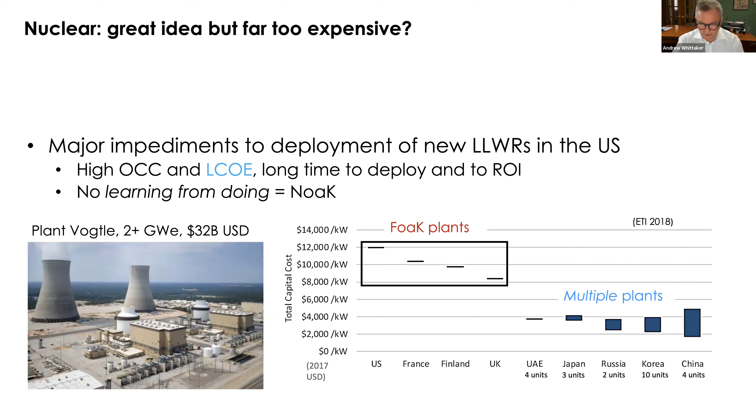So if I step back and I look at the recent experience in the United States, and some of these numbers were assembled in concert with colleagues at Southern Company. If I look back at plant experience, and I try and break the whole process down into pre-construction and construction. The pre-construction activities spanned 8 years. They involved FEED studies that are listed here, ranging from geotechnical studies, probabilistic seismic hazard calculations, SSI analysis, scheme level design, design development, and then production of construction documents, internal and external events, PRA, and licensing. And this took more than 8 years.

And then we move on to construction, which overlapped with some of the pre-construction activities, and there's a further 12 years. So more than 20 years to achieve a return on investment. And in discussions I've had with folks interested in nuclear, but not nuclear engineers, this seems to be a recipe for no commercial customers. One of the challenges that I'll talk about today is the seismic load case, which by and large makes every build nearly a first of a kind.

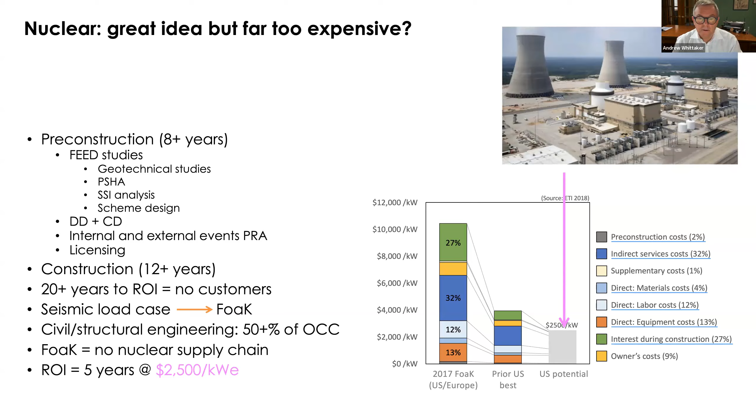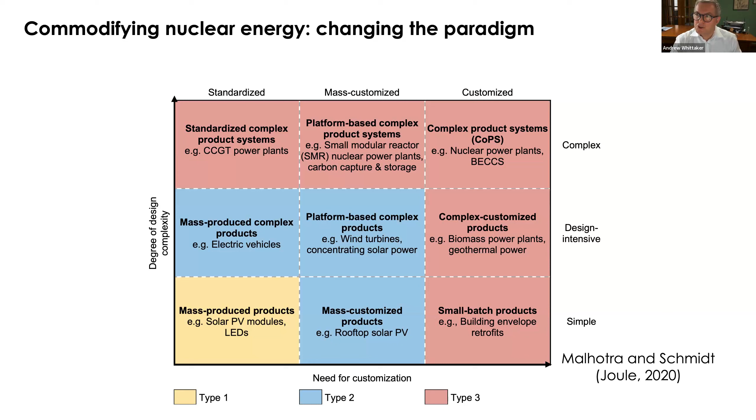And I look top right and I look at complex product systems, first and foremost, nuclear power plants. So highly customized and considered to be quite complex. So I think our challenge is to move nuclear from the top right in pink to the bottom left in yellow. If we can produce these as mass-produced products, nuclear plants, then I think we can achieve our goals of this 10 terawatt moonshot, building hundreds and hundreds of plants becoming no-brainers, and moving away from the highly customized, complex process and product that we have now.

So as I step back as the chair of the Nuclear Standards Committee, I look at our standards, and ASCE publishes ASCE Standard 4, publishes ASCE Standard 43. One deals with seismic analysis, the other deals with seismic design. We have a broad remit in that these standards evolved out of DOE documents, and we're now looking to answer the question, how do we write these standards so they function well for DOE, that they serve as a basis for possible NRC licensing going forward.

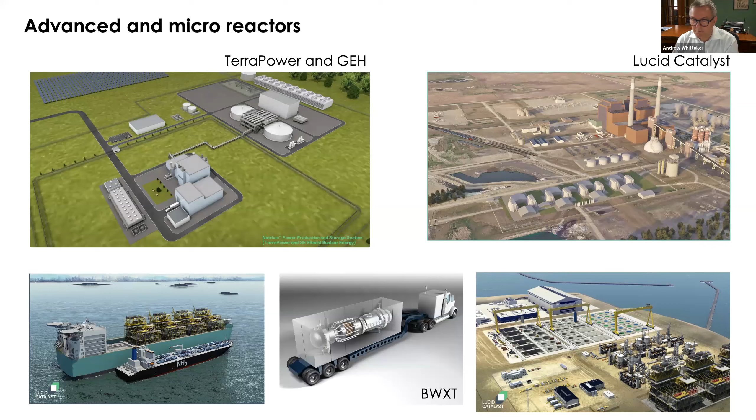So we have to be sufficiently prescriptive so someone can follow the rules. We have to be sufficiently general so we don't stifle innovation. So we want to be part of the solution, not part of the problem. So let me move on from commodifying nuclear to a pet topic of mine. And I would encourage everyone to think about how we treat external hazards and risk. So I'll talk a little about risk-informed performance-based design.

I'm an advocate for risk-informed performance-based design, but we have to ask ourselves the question, are we treating some of these external hazards appropriately? And are our risk targets sensible? I think it's time to revisit some of these risk targets for reasons that I'll describe in a moment. So I'm going to pick on a couple of load effects that I'm familiar with. And I'm going to preface my remarks by saying these external hazards and the risk targets we choose have an impact on cost. And I'm kind of laser focused on cost.

And we have to also consider safety. And we have to look at safety not as nuclear alone, but in terms of other risks that we accept on a daily basis in society. So I am focused on cost, and I'm not going to relinquish safety one bit. I'm just looking to right-size our consideration of safety. So the three load effects I'll spend a few moments on are wind-borne missile impact, aircraft impact, and extreme ground shaking. And then I'll talk a little about acceptable risk, and that might trigger some discussion from those on the call.

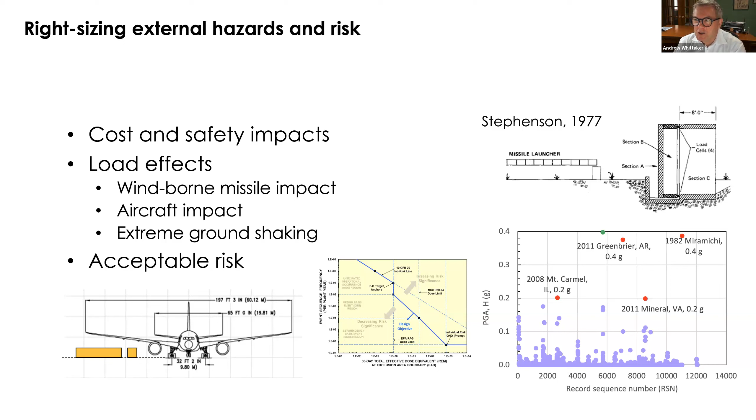So those on the call may or may not be familiar with design of nuclear structures for wind-borne missiles. There are two regulatory guides that deal with this topic. One deals with tornadoes, one deals with hurricanes. And the genesis of these documents can be traced to work done at Sandia, funded by EPRI and other organisations in the 1970s.

So the figure top right, taken from a publication by a colleague of mine and others on the call, John Stephenson, reported on work done at Sandia in the mid-1970s on wind-borne missile impact, where telegraph poles, large diameter steel pipes and the like were projected into reinforced concrete panels with the goal of trying to understand how these panels behaved under such extreme loadings.

That resulted in the writing of documents, including the regulatory guides, that date back to the late 70s and early 80s, where one considers the normal impact of a high velocity missile on a reinforced concrete target. So the most damaging of the missiles that are considered is a Schedule 40 steel pipe, 6 inches in diameter, about 15 feet long, weighing 130 kilograms, impacting a panel at somewhere between 41 and 94 meters per second.

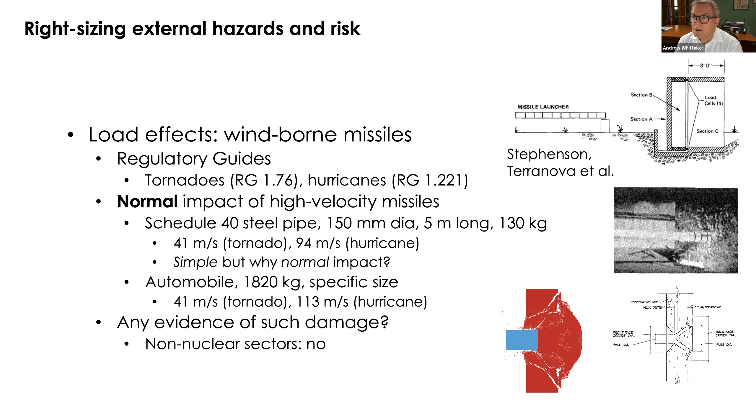Another important consideration, aircraft impact, that was a reaction to 9/11. And I'll note that I spent time at ground zero after 9/11, and it certainly impacted how I thought about building robustness and things of that nature. But I will just note here that the cost of dealing with aircraft impact on a nuclear structure is significant. And I will also note that aircraft cockpits in the United States and abroad have been secured for more than 20 years. There's no evidence, to my knowledge, of hijacking of commercial aircraft since 2001. And then the question is, could you strike a nuclear target, and why would you choose a nuclear target?

So shown in the figures at the bottom, this stemmed from a discussion I had with colleagues about aircraft impact on a microreactor. And I must admit, I shook my head and said, how on earth would you hit it? And so drawn to scale is a Connex box in orange, and courtesy of Boeing, the 787 aircraft. And then the issue is, if you did hijack an aircraft, why would you pick a reinforced concrete box, not a political target? So if you assume that the aircraft can be hijacked and you wanted to hit a reinforced concrete box, could you hit it? And all of the evidence would suggest no.

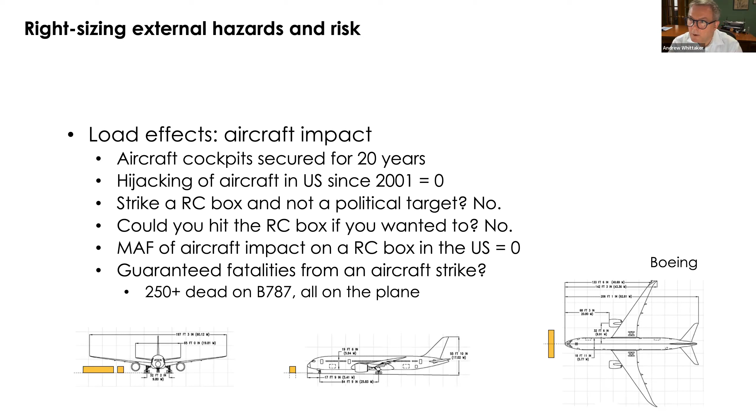So I'd argue that the mean annual frequency of aircraft impact on a reinforced concrete box housing something like a microreactor is close to zero. And I will note importantly that the guaranteed fatalities from an aircraft strike or a miss is everyone on the aircraft. And that's not lost on me. So this is one topic I think we ought to be rethinking. We don't design large commercial buildings for aircraft strike. We don't design political targets, let me call them, for aircraft strike. And so why are we designing civilian infrastructure for aircraft strike?

Onto incredible ground shaking. And that is a topic I'm well familiar with. I've worked in this space for a long, long time. And as we were working on a topical report I'll describe in a few moments, we looked to site an advanced reactor at Clinch River, the Oak Ridge National Lab. And if I somewhat arbitrarily assign this advanced reactor to seismic design category 4, which those involved in the writing of ANS 2.26 will be well familiar with, I've listed here levels of ground shaking that would be considered for design, and then more extreme levels of ground shaking that would be considered for risk assessment. And the two figures in the bottom and bottom right represent important information.

So when one performs probabilistic seismic hazard assessment, one uses ground motion prediction equations and recorded data to develop what we call seismic hazard curves that are then turned into response spectra. Shown in the figure bottom middle is every piece of recorded data in Central and Eastern North America collected over about a 60-year period. And these data were used to develop the ground motion prediction equations for the Central and Eastern United States. This was work funded by the US Department of Energy, the US NRC, and the US Geological Survey. But the important point to note here is the scale on the y-axis.

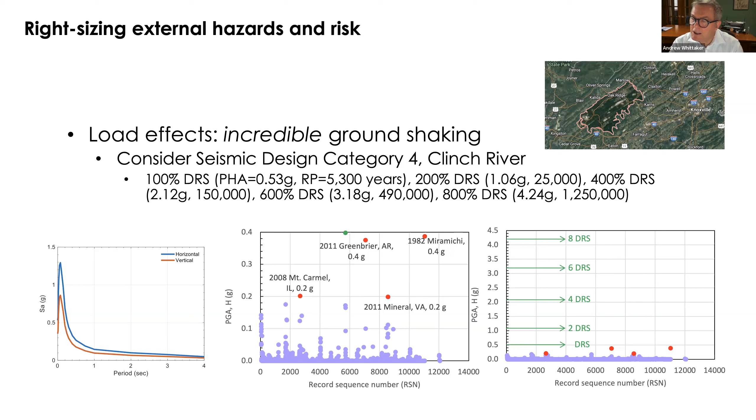So in my opinion, as a civil structural engineer, we need to rethink how we represent ground motion and how perhaps we cap levels of ground shaking used for risk assessment based on recorded data in the United States and perhaps abroad from similar tectonic regimes.

Moving on to tolerable risk. And I've had a series of discussions with folks, some folks on this call and others in ANS space, about our QHOs, our quantitative health objectives, and perhaps the need to revisit them. And I'm just going to put some numbers out there for folks to think about. And I think it's important that we have this discussion about what is acceptable risk.

So I just assembled some numbers here for the purpose of really trying to benchmark what society might accept in terms of risk. So your mean annual frequency of dying in a car accident in the coming 12 months is about 1 times 10 to the minus 4. The mean annual frequency of a modern building collapsing due to earthquake shaking is 2 times 10 to the minus 4. And if a building collapses, by and large, everyone inside will die. The mean annual frequency of death due to dam failure is somewhere between 1 times 10 to the minus 4 and 1 times 10 to the minus 5.

And so these risks are substantially larger by orders of magnitude than the risks we routinely consider, or the risk numbers we routinely consider, for design of nuclear energy facilities. So it's my opinion that now is the time to revisit risk targets for nuclear structures.

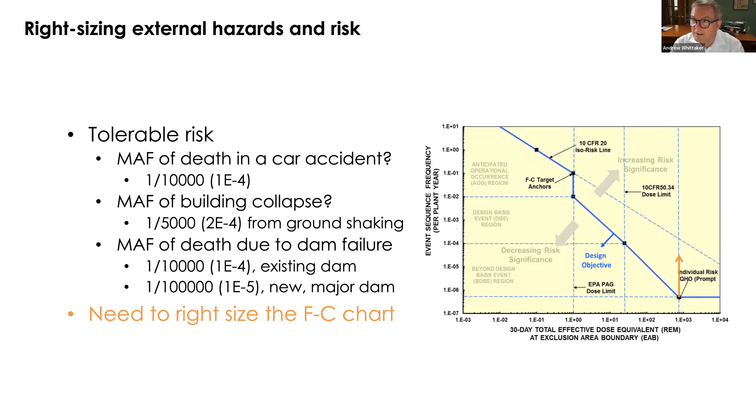A point of reference here, known to everyone tuned in today, is that we saw wholesale destruction of reactors at Fukushima Daiichi 12 years ago. No one died because of radiation poisoning. More than 20,000 died due to the tsunami. So we have very little data, but the data we have doesn't necessarily support the risk numbers that we're currently working with. So as we look to commodify advanced reactors and microreactors, I think we really need to revisit these risk targets and the QHOs.

So let me move on and talk about the earthquake load case and seismic isolation. And it's my opinion that as we treat earthquake shaking at present, it means that every nuclear build is a first of a kind. And so how do we right-size this problem? Well, I just note for those unfamiliar with the earthquake load case that seismic hazard varies by proximity to a fault and local soil conditions, and seismic hazard is routinely characterized for nuclear applications through a SSHAC process.

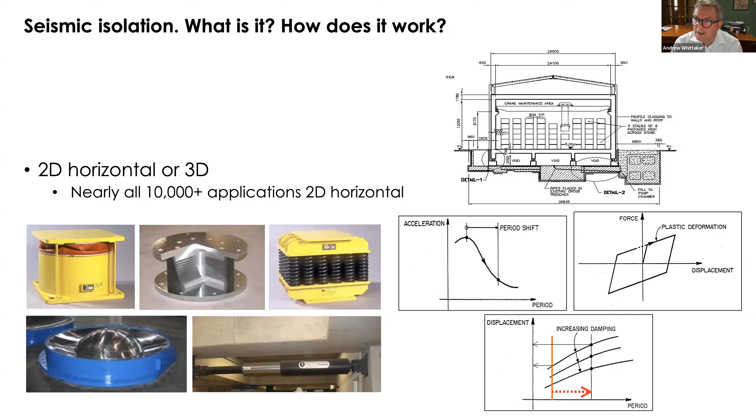And I will note that this is a technology that is not new. This has been used in the United States since 1979, where we had the first application of seismic isolation to some mission-critical equipment in Southern California. But the slide here is meant to illustrate the breadth of application. So figure top right is a Sakhalin gas platform built off the coast of Russia in the very early 2000s. The isolators used for this particular facility are each rated to 17,500 metric tons.

The same type of isolator at a very small scale was used to isolate the statue bottom right. This is the statue of Hermes, now at Olympia. And the isolators here are identical in geometry, but scaled to Sakhalin. These were rated to 500 kilograms each. So 17,500 metric tons per isolator, 500 kilograms per isolator. I'd argue that the article that's isolated bottom right is more valuable than the article isolated top right.

But other applications, most dating from the last millennium: the San Francisco International Airport under construction, the San Francisco City Hall, isolated after the Loma Prieta earthquake, an LNG facility, that's the figure at the bottom middle. These are friction pendulum isolators installed at Revithousa in the 1990s. A British Trident submarine, seismically isolated while in dry dock at HMS Devonport at Plymouth. A Department of Defense radar facility in Alaska. And bottom left is a hospital in Southern California perched right on top of the San Andreas Fault. So a broad spectrum of applications.

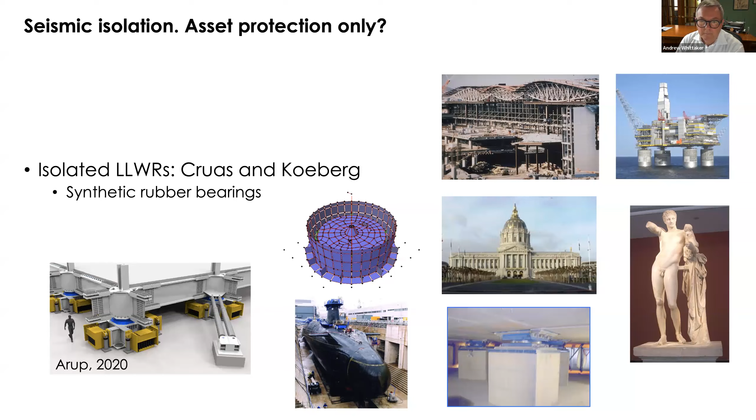But the takeaway here is that there has been a significant investment in seismic isolation technology and considerations of applications to nuclear structures going back to the mid-2000s, starting with work funded by the US NRC and led by Dr. Budnitz, through to a topical report that I'll touch on that is about to be submitted to the US NRC, and two ongoing projects, one that's being led by my nuclear colleagues at MIT on a horizontally configured high-temperature gas reactor that will be seismically isolated, and a project now underway looking at the gamma irradiation of seismic protective devices. This is a project where work is being done at the Idaho National Lab.

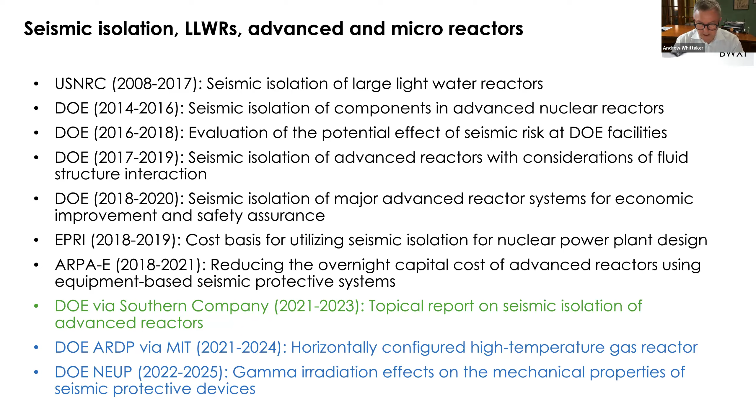So sticking with technology readiness for a moment, I think we all know that one of the challenges at Plant Vogtle was steel plate composite construction was deployed, and in hindsight, it wasn't technology ready. It might be technology ready now, but it wasn't back when Plant Vogtle construction started. This was not lost on us. And so we've worked hard to provide a pathway to deploy the technology through codes and standards.

So we have our standards, our ASCE standards 4-16 and 43-19, dealing with analysis and design respectively. Each document has a chapter devoted to seismic isolation. And the strategies deployed in those ASCE standards map to target performance goals presented in ANS 2.26. Then we have three US NRC NUREGs on technical considerations for seismic isolation of nuclear facilities, but this focused on large light water reactors. And then we have companion documents also developed with funding from the US NRC on seismic isolation of large light water reactors using elastomeric bearings and sliding bearings.

Last but not least, we have the report that Southern will deliver to the US NRC shortly that looks at guidance to implement seismic base isolation for advanced nuclear reactors, although I'll note here that the approaches that we're presenting in this topical report are equally applicable to micros and large light water reactors.

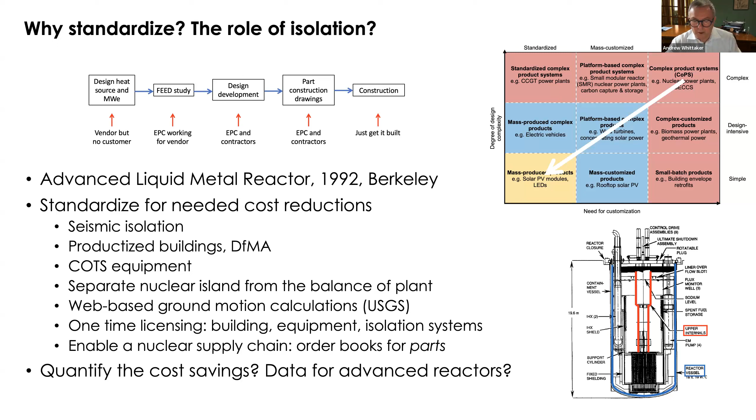And if we can standardise buildings and standardise isolation systems, I think we have an opportunity for one-time licensing of building equipment and isolation systems, enabling a robust nuclear supply chain. Now, one issue that came up a number of years ago was the cost savings. How can we quantify them? And we went through an exercise with work funded by EPRI and DOE to try and characterise the benefits of standardisation on the cost of equipment.

And without going into all of the details here, we see that for my two example pieces of equipment, in one of two buildings that we considered, we can achieve cost reductions in equipment of a factor of 5. And here we're comparing first-of-a-kind cost of equipment conventionally founded through nth-of-a-kind equipment attached to standardised plants if seismically isolated.

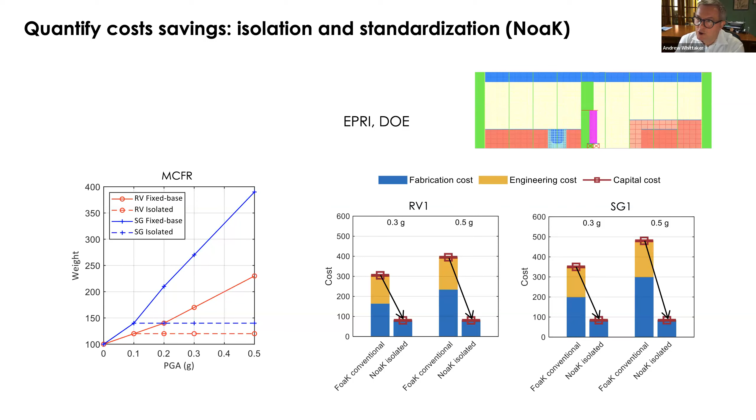So we don't have crisp cost data on reactor vessels and steam generators because they haven't been fabricated yet. But the data we did collect and the domain experts we did poll gave us high confidence that if we can get to standardised plants enabled by seismic isolation, we can achieve the cost reductions that we need to make nuclear viable.

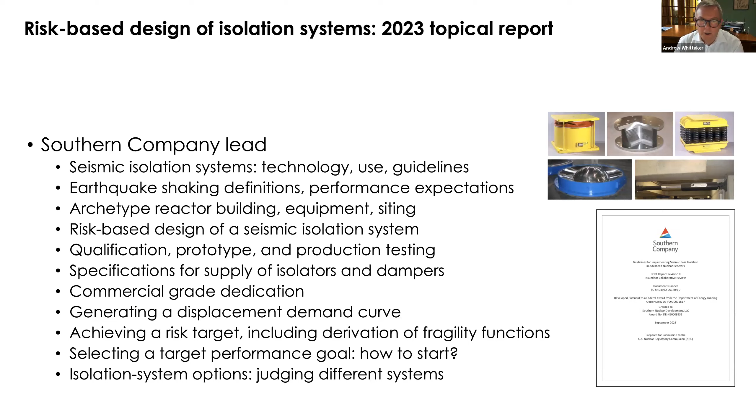Let me just touch on a topical report that's about to be submitted to the USNRC. Southern Company is the lead for this particular project, and we're not going to touch on all of the topics in the topical report today that are listed here on the screen. But because we're talking about risk-informed performance-based design, I thought I'd touch on one important component of this topical report, namely a risk-based design of seismic isolation systems. This hasn't been done before, but it's actually rather straightforward. And so we're going one step beyond risk-informed design. This is explicit risk-based design of seismic isolation systems.

And the topical report, which will also be published as an MCEER report available for download from the University at Buffalo website, will lay this process out in some significant detail. But the topical report is intended to provide a roadmap for an applicant to design a seismic isolation system. So the goal of submitting this topical report is that the NRC will review it and endorse certain parts of it. But long story short, we take seismic hazard data and transform that seismic hazard data into what we're calling seismic displacement demand curves, which are isolation system specific. But the process is straightforward.

With those seismic displacement demand curves, we then utilize an isolation system fragility function, where that fragility function is developed using process and procedure that the NRC has seen now for many years, but just applied to a seismic isolation system, not more conventional nuclear infrastructure. With the displacement demand curve that we generate from our seismic hazard curves, we integrate that with a fragility function, and we can achieve a target performance goal. So the computational process is straightforward. The development of the fragility function is straightforward, and we establish isolation system capacity by prototype testing, dynamic testing to large displacements at high velocities of seismic isolators.

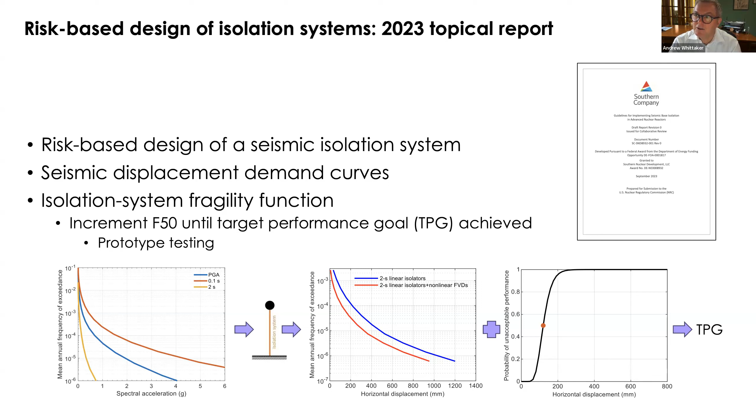So where do I want to land with all of this? Ideally, we end up with licensed design spaces for advanced reactors. And we've been working with colleagues at MIT on how we do this. We have pre-licensed seismic isolation systems with different capacities developed for different advanced reactors that by and large enable the speedy design of a nuclear structure. So if we have a pre-licensed building, and seismic hazard as characterized by the USGS ground motion calculator, we can basically select for a given site in a given soil condition a seismic isolation system that delivers the requisite performance.

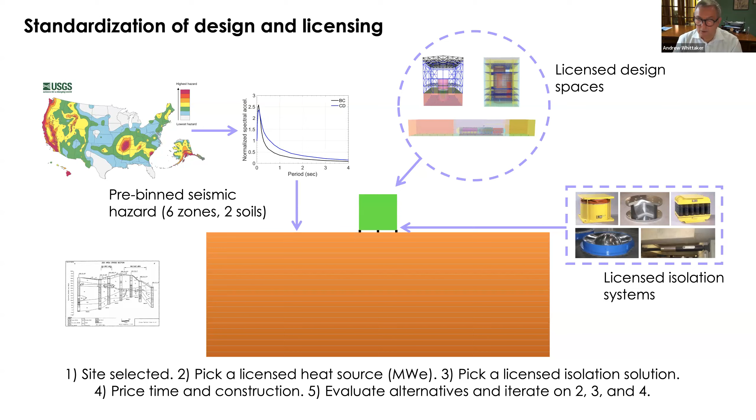But the goal here is to chisel down the design time from 8+ years to, realistically, it doesn't need to be anything more than 8 weeks. And in doing so, I'm putting civil engineers out of business. I understand that. But that's the price we pay to deliver new build nuclear at the scale that I think we need to deliver it at to achieve climate targets. So with that, I'll finish.

I have a long list of people to thank because many have contributed to the writing of these documents and the building of the intellectual basis for deploying the technology. So I have colleagues at the University of Buffalo and at MIT. I serve on the board of directors of a climate non-profit, Terra Praxis, and they have contributed in a very meaningful way to a number of projects that we've worked on.

Colleagues working on standardised buildings in London, Bryden Wood, work funded by the US Department of Energy, the US NRC, and the US Advanced Research Projects Agency-Energy as part of DOE. Lawrence Berkeley National Lab and Dr. Bob Budnitz, who's on the call. He deserves a big round of applause for where we've managed to get to now through counsel, knowledge of the topic, and knowledge of many topics.

Colleagues at the Idaho National Lab, EPRI, Southern Company, and we've done a lot of work in the last couple of years with reactor developers, wanting to make sure that what we do helps them innovate. It doesn't stifle innovation. So some of the folks who we've been working with are listed here, including Kairos Power, X-energy, TerraPower, Boston Atomics, and BWXT Rolls-Royce.